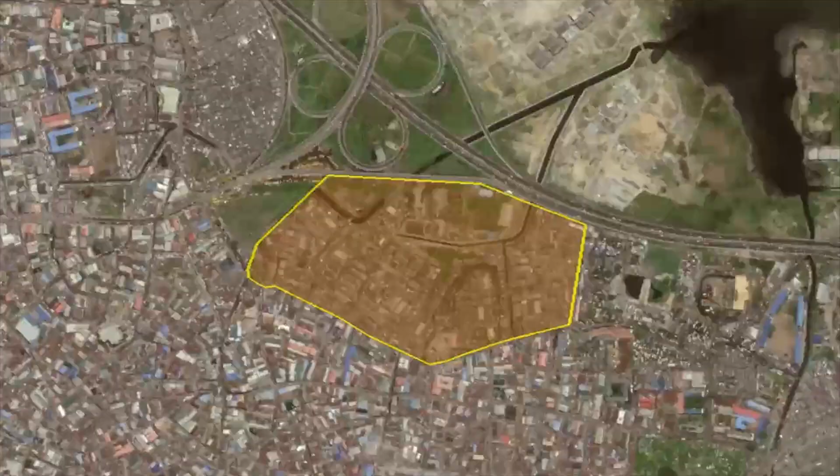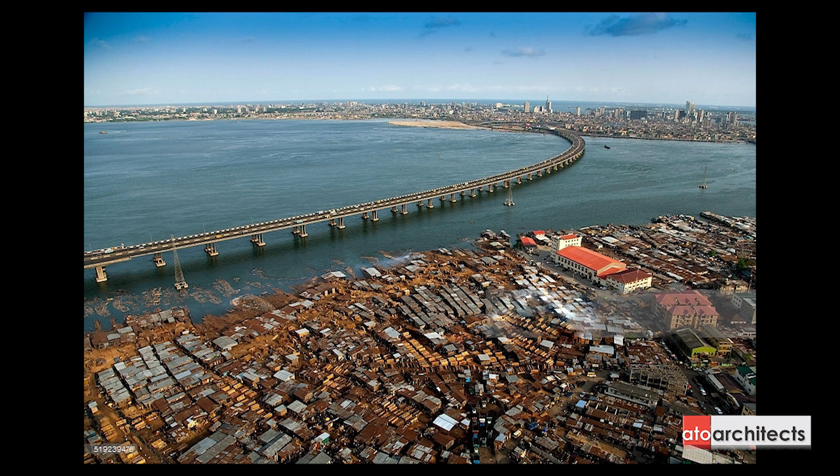Until 1996, the 11.8 km long Third Mainland Bridge, which stretches from Oworonshoki to Adeniji Adele Interchange on Lagos Island, was the longest bridge in Africa. In the process of constructing the bridge, the area had to be sandfilled, giving birth to the landed property on which the Adeniji Adele housing estate now sits.

Under the administration of Alhaji Lateef Jakande, first civilian governor of Lagos State, several low to medium housing estate schemes were carried out in various parts of the state to fill the very urgent need of housing of the citizens. The Adeniji Adele housing estate, which was constructed between 1977 and 1982, was one of these developments. The development was named after one of Lagos Island's greatest monarchs, the Oba of Lagos, Adeniji Adele II.

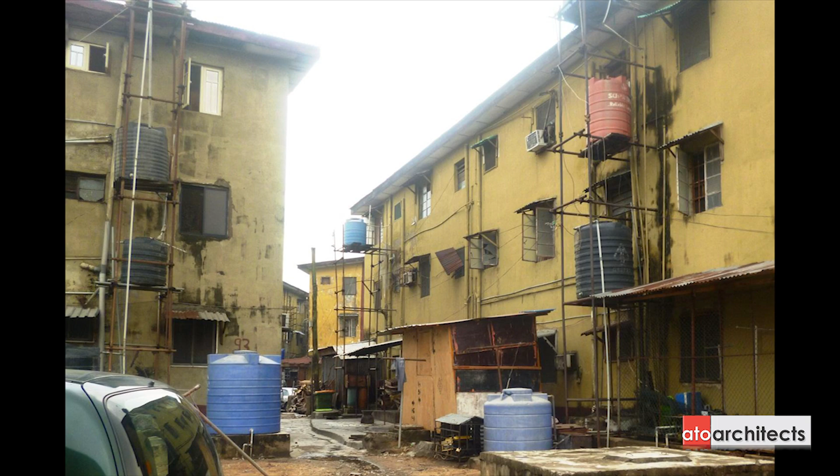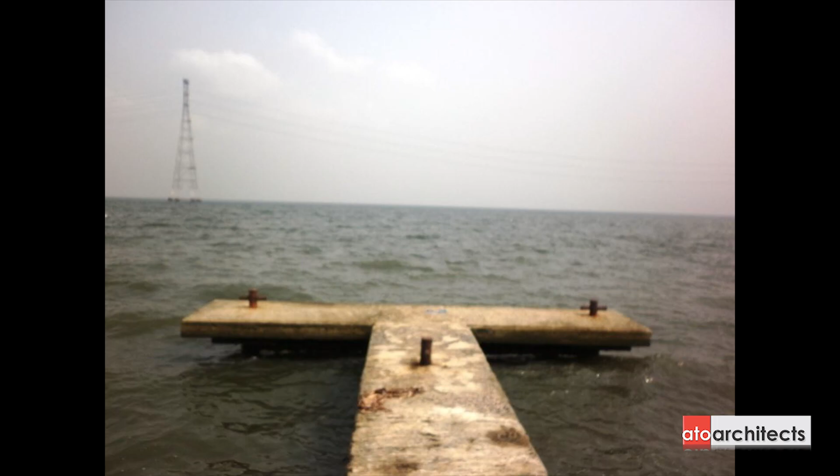Due to the urgency of housing needs at the time, the four-phase development was done very quickly and no soil test was carried out. A system of canals leading to the Lagos Lagoon, which would have been sufficient to drain surface water from the estate, has been turned into a rubbish dump, and stagnant water further deteriorates the already weak structures.

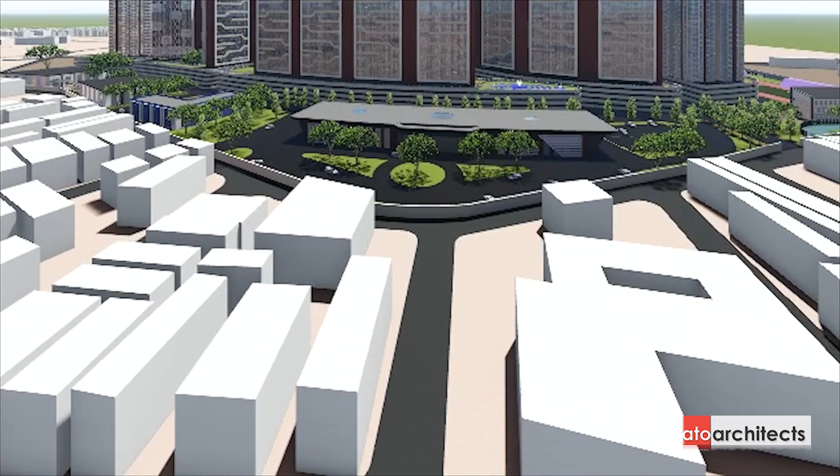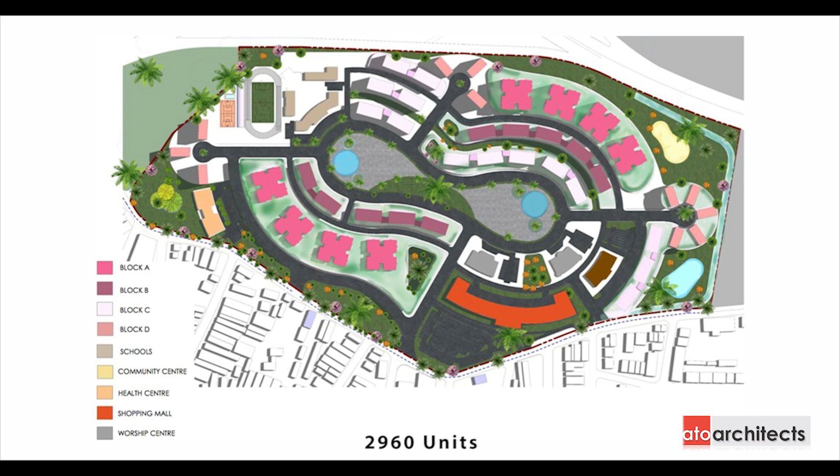This project is one of the initiatives under the purview of the Lagos State Urban Renewal Agency, LASURA. Following LASURA's requirements to provide a minimum of 2,500 housing units, the ATO Architects Limited design team has explored a few design options for sustainable urban regeneration of the area. We present three options for spatial development, containing 2,600, 2,640, and 2,960 dwelling units, respectively.

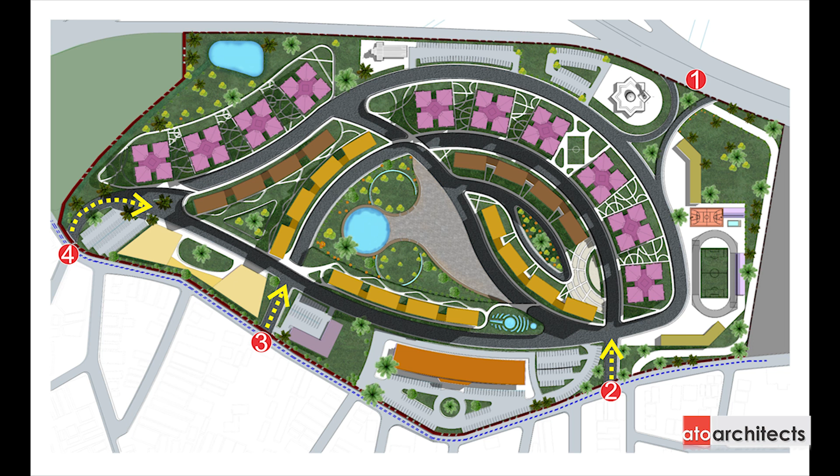With a resident population expected to far exceed 10,000 people, the access and road networks are critical. The proposal has allowed for 4 entrances and exits to Adeniji Adele Road, and an alternative entrance and exit has been provided from Adeniji Adele bus stop along the expressway to ease congestion.

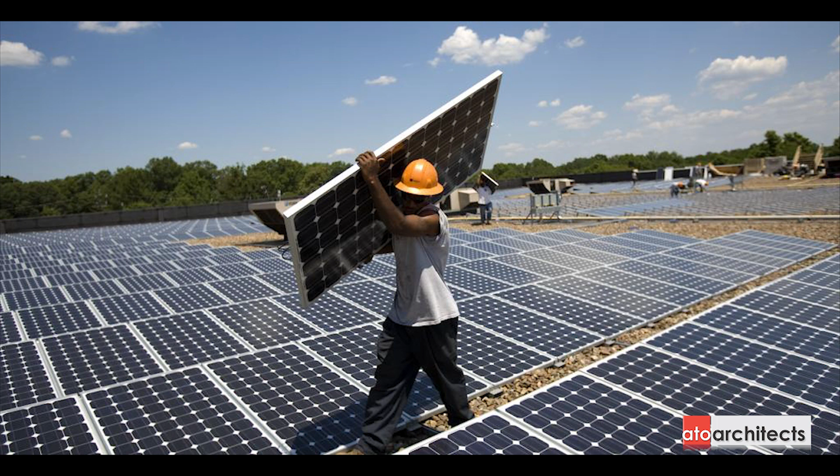Our holistic infrastructure strategy comprises the use of solar panels to take advantage of energy from the sun and passive design techniques. All emergency exits, street lights, lifts, and public lobbies will have backup power supply.

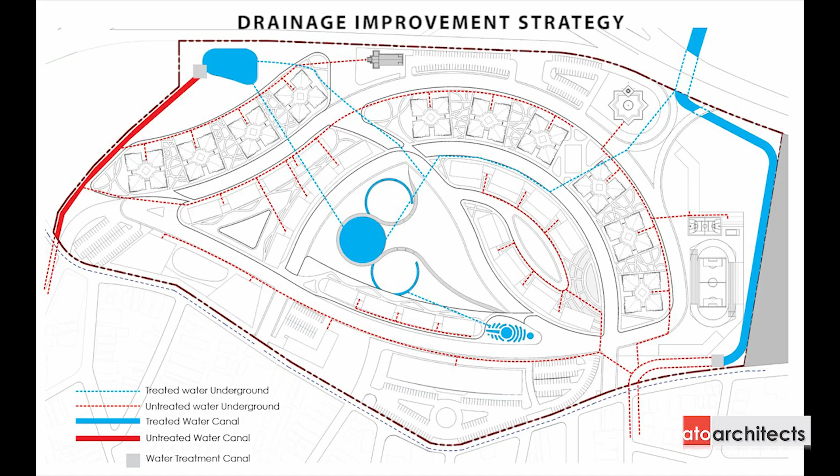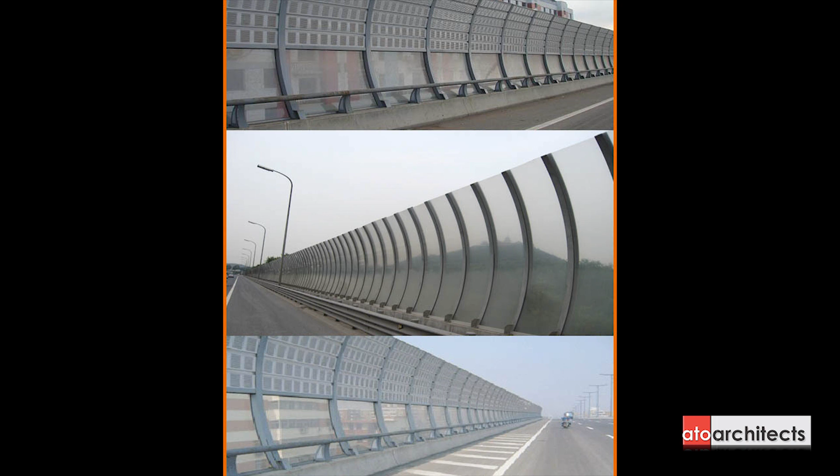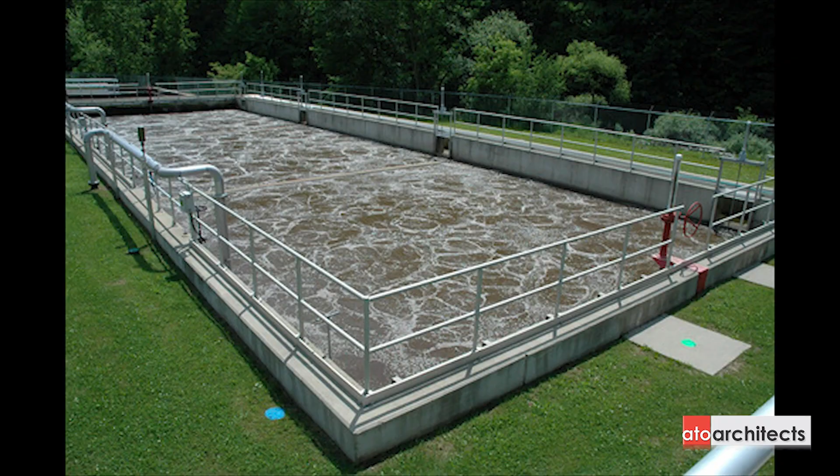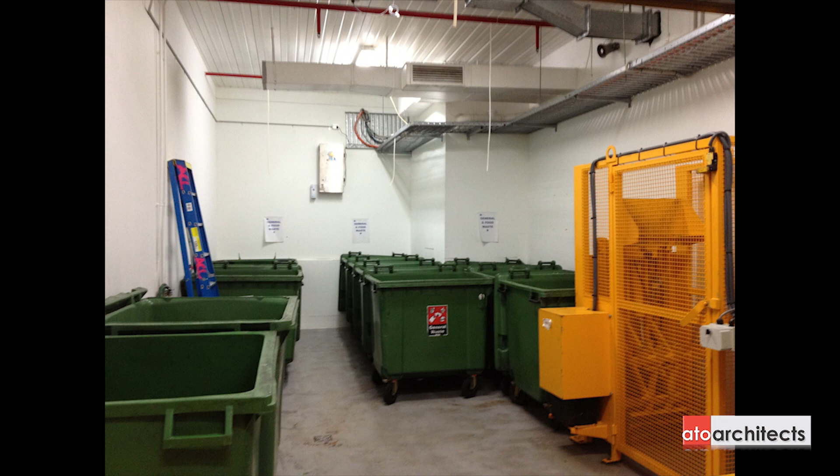A drainage improvement strategy involving the remediation of canal sites, rerouting of existing canals, and provision of high transparent barriers which allow visual access but restrict physical access to the canals as a tool for curbing waste dumping. A central sewage treatment plant, water recycling with rainwater channels draining into purification and aeration systems, garbage chutes, and designated recycling bins will be provided for appropriate solid waste disposal, and policies to ensure waste is collected daily.

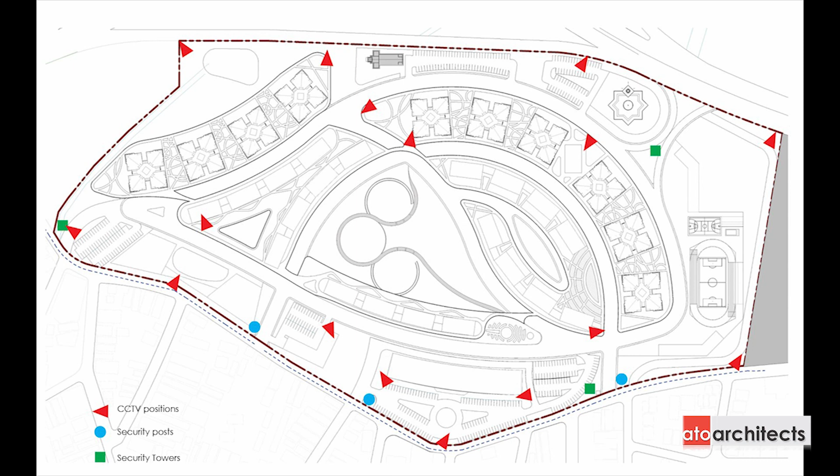Our circulation and transportation strategy will facilitate ease of pedestrian movement, alternate routes for cycling, and an estate shuttle service with appropriate bus stops, with provisions made for the future cable car proposal for Lagos State. Security will be provided using CCTV cameras and security personnel in buildings, as well as manning elevated security posts and patrols.

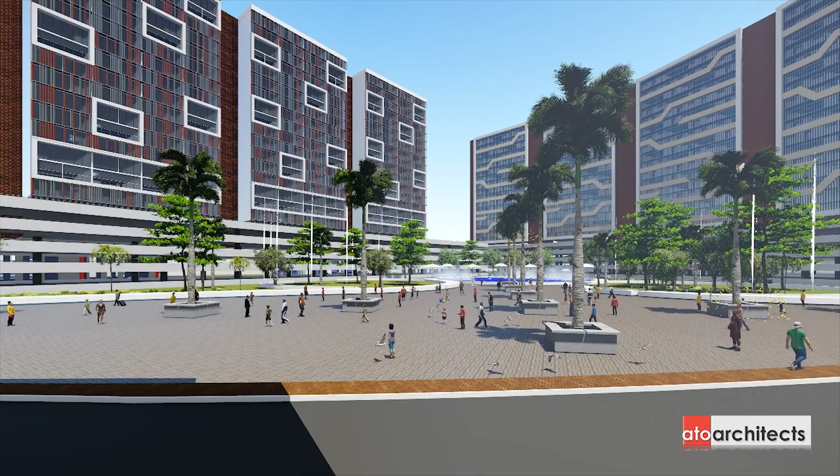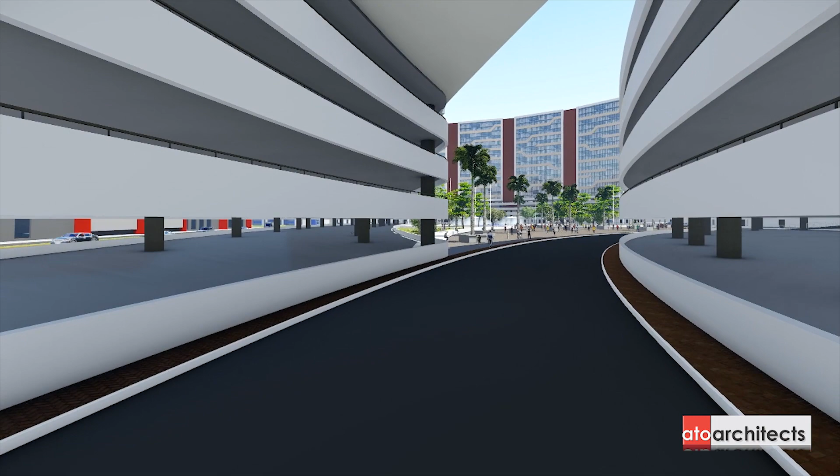Our landscape improvement plan includes a central recreation park with water features fed by the canals, a multi-story parking podium with relaxation areas for the residents, and extensive greenery around all the structures for environmental therapy, reducing urban heat islands, as well as ridding the air of carbon dioxide and other toxins.

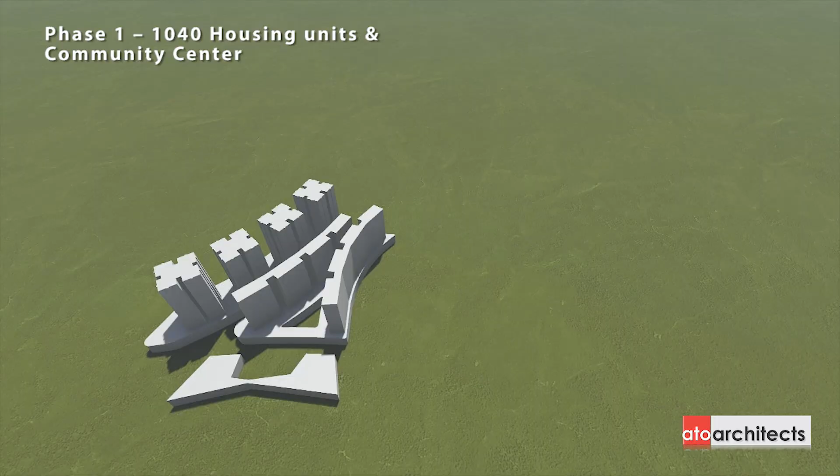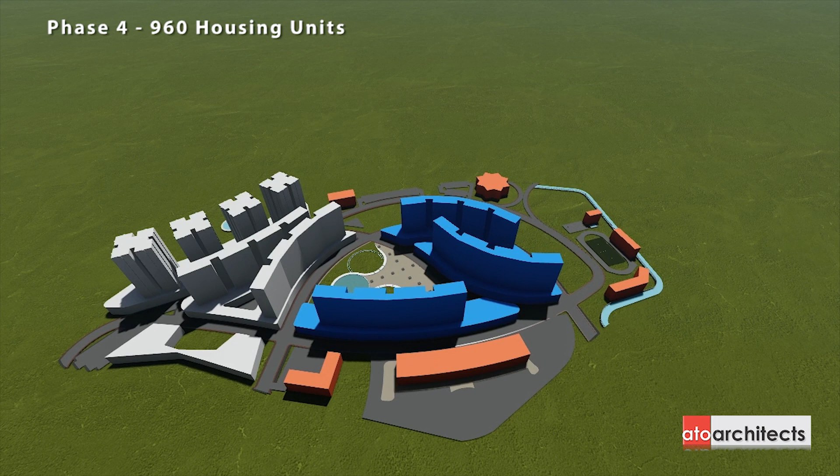For sustainability and financial viability, we propose that the redevelopment is carried out in 4 phases. We propose that infrastructure is developed as required for each phase to spread the cost of development as it pertains to roads, water, sewage treatment, power, drainage, transportation, and so on.

The Lagos State Government, working through its Lagos State Urban Renewal Agency, LASURA, sees the huge potential in reinventing the Adeniji Adele housing estate and indeed its environs on all sides. The ATO Consortium shares this vision as well. To achieve the ultimate goals of this development, we have assembled a team of experts. We are committed to rebuilding the Adeniji Adele housing estate and raising it to world-class standards.